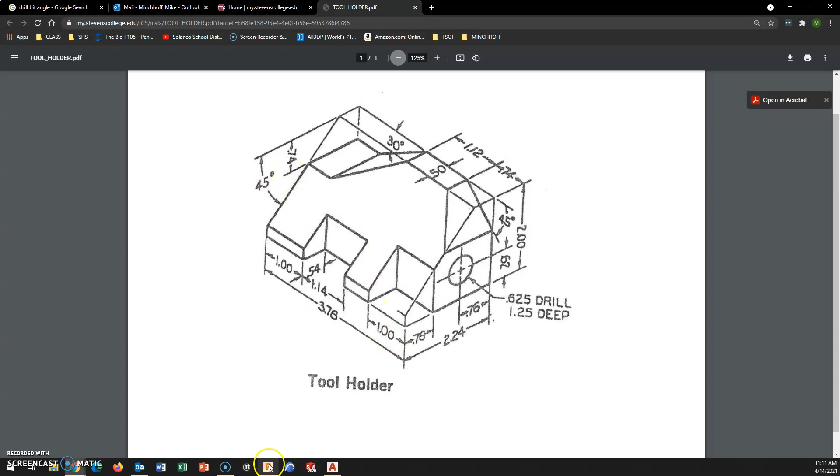Alright, for this tutorial, we'll take a look at creating the tool holder with AutoCAD. The new component here is a drilled hole to depth, and the drill hole to depth has the drill point on the end, which we want to recreate. So I have a 3D model here to demonstrate this.

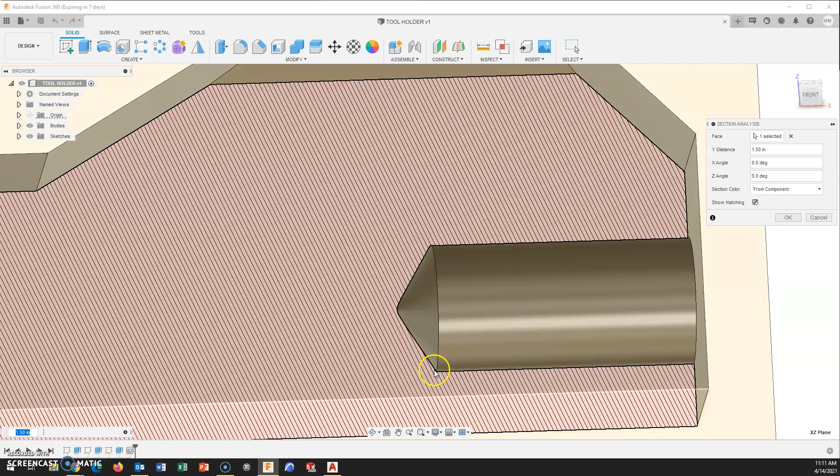We are looking to create the shoulder cut, where it goes from being a cylinder, that is your depth measurement, to creating this conical end. This is that drill point angle. We are going to demonstrate this with a 118-degree drill bit angle, which is one of the two common sizes. Most of your jobber drills are a 118-degree angle. So this is just proof that this 118-degree angle does exist and how common it actually is.

That being said, I did put the inverse angles on the lesson outline for this, and knowing how AutoCAD snaps to angles, this may be relevant information.

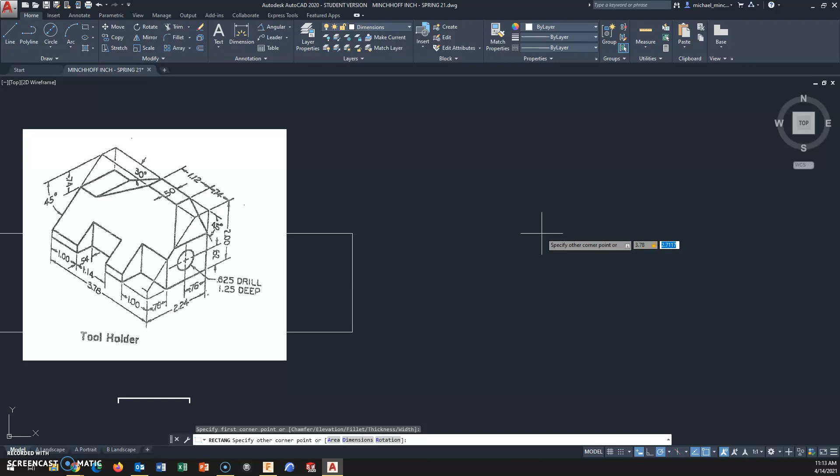First off, let's start with our overall layout. By using the rectangles, I can put in the overall length and width here in the front view. I have an overall length of 3.78 and an overall height of 2, and start building off of this. I'm still recommending a 1.5 inch spacing in between your views.

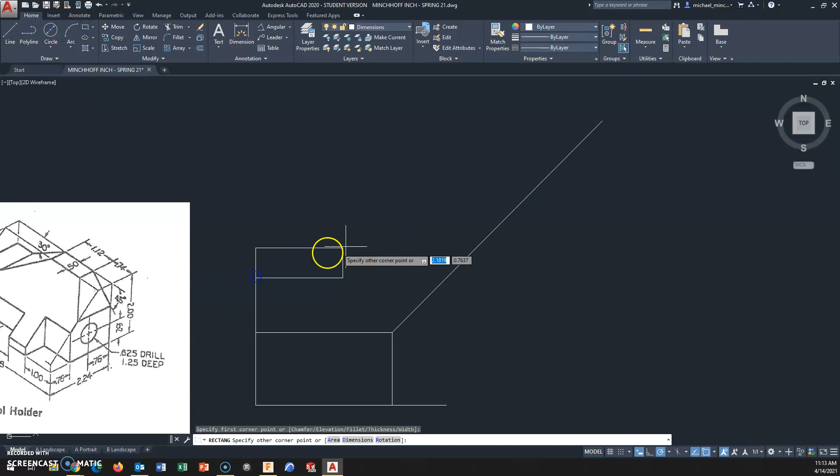And we will create the other boxes and confirm that they project. So the top view, my length is the same, 3.78, by the width is 2.24. I'm just going to confirm that that width is the same.

I could project over, but using the rectangular method, it's probably just quicker to draw it. So, 2.24 left to right, and an overall height of 2. Again, just to ensure that these project.

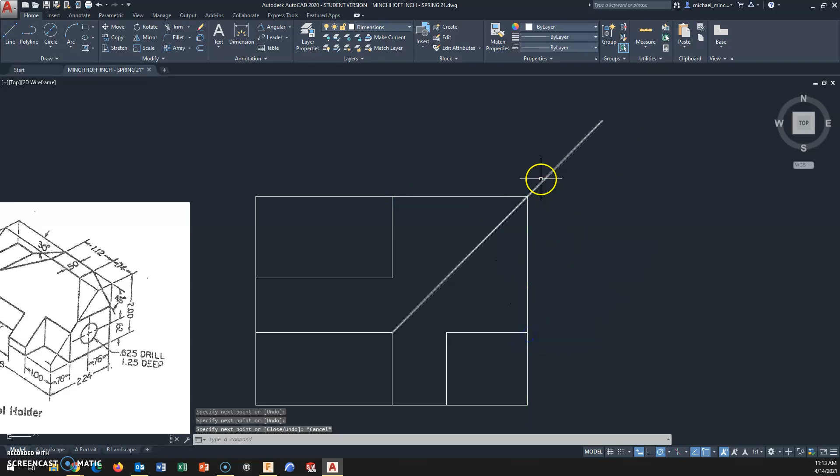Ready to roll. Okay, when using the rectangle, a reminder is that they are grouped together. These are not individual line segments. I would explode all of these at one time. Now I have independent line segments.

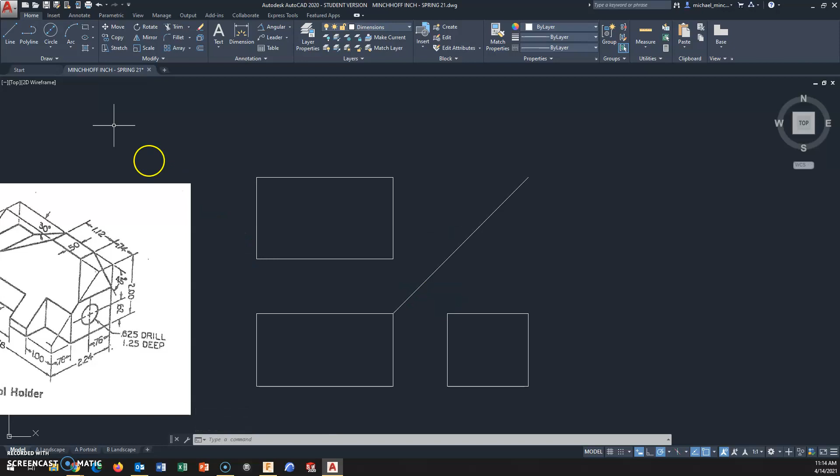Top, front, or right side view wouldn't matter because basic shape, you can really start constructing in any of the views. I'm going to start constructing here in the right side view.

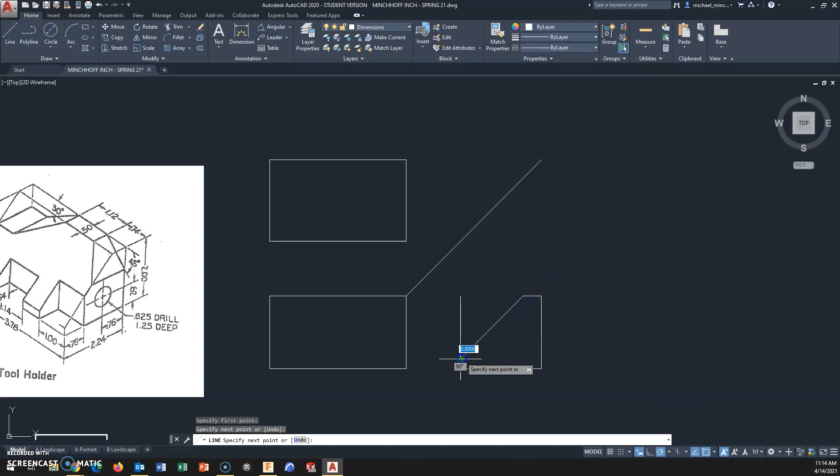Distance across the top is 0.5, and now a 45-degree angle. I do have my angle snaps to 15-degree increments, so a 45-degree angle should snap relatively easy. That will also play in the part with these 30 and 45-degree angles on the top.

So go right here to the right side, come in 0.74, drop a 45, create that 1.12 across the top, and drop a 30-degree angle. And as of right now, I'll extend this.

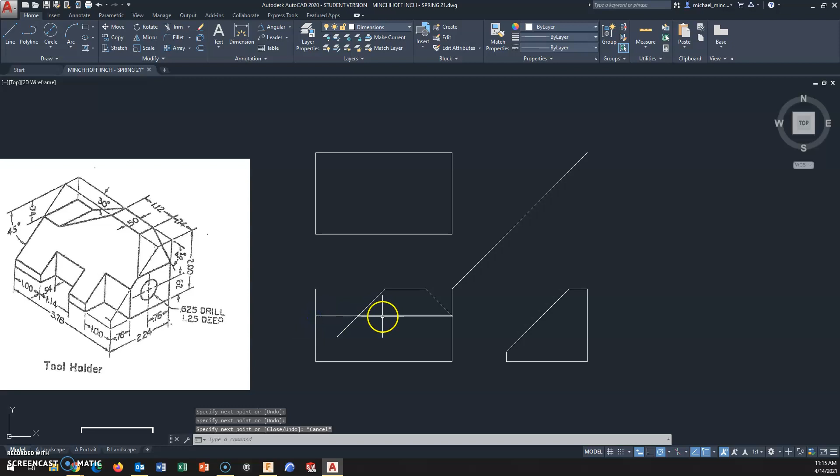Being that this is 0.74 and this is a 45-degree angle, this distance down from the top is 0.74. You can just project this across, and we can project that to the right side as well. I can project straight across for that edge that is created here. I will also have an edge that goes along the bottom from this 45.

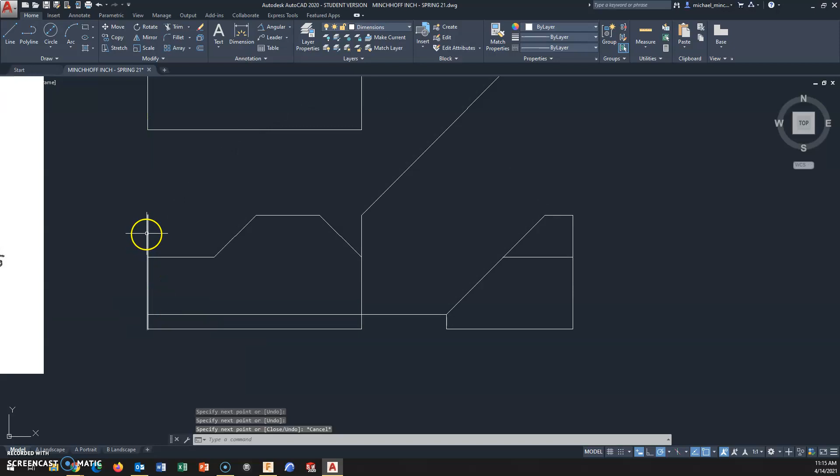So take a second and clean these two up momentarily. All right, so pretty much my rough shape here in the front and right side views. Let's go up here to the top.

So as I measure in 1 inch, I then measure back 0.54. I measure over 1.14, this comes right back out, measure over 1, measure in 0.76. This corner is going to get cut off and connect this corner.

So let's clean this corner up. There's my rough shape in the top. Now it's time for some projection.

I can project over and down for this 0.76 cut. That one's done. I can project down for that 1-inch cut. Now that I have this created, I can project across.

So this edge does not exist because it's cut out of this 45. And I got that through my projection method. So there's this rectangular face cut out to the next rectangular face. I'll just project down first.

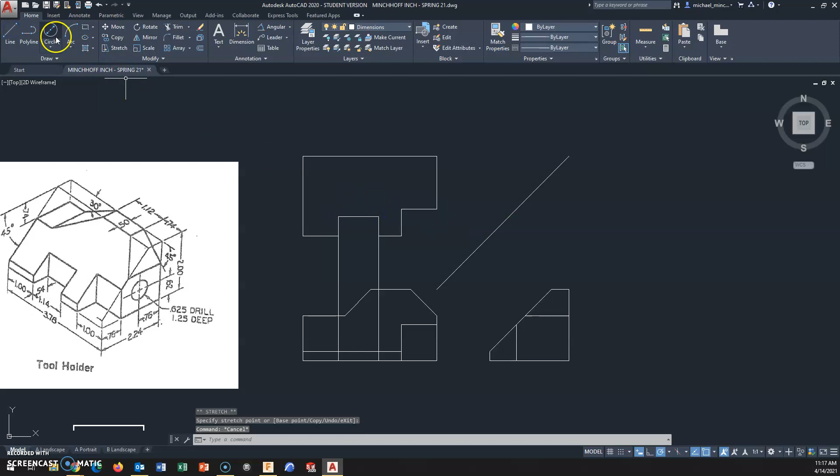Somehow I have the wrong measurement here in the top. This is 0.74, which it is not, it's 0.54. 0.54. I think I caught that before I projected all that information. So this 0.54 will project over and down.

This will be a hidden line, and it will project across to create that rectangular face in the front view. So trim this off. Stretch or trim. That's a projection line. All these lines are projection.

So other than the drill point, the drill hole to depth, the front view is really done. The right side is really done other than the hole. I have all this information to project to the top. So this is that 1/2 inch measurement across the top. And this is going to project up. And then it's going to project out at an angle, which is generated from this corner in the front view.

Alright, so this one cleans up. And this projects across. That's that flat face across the top. The other flat face across the top. And I need an angle projection here, which is going to be projected from the front view. And I need this hidden line. No, they do line up. That's right, because they're the same depth. They're 0.74 down.

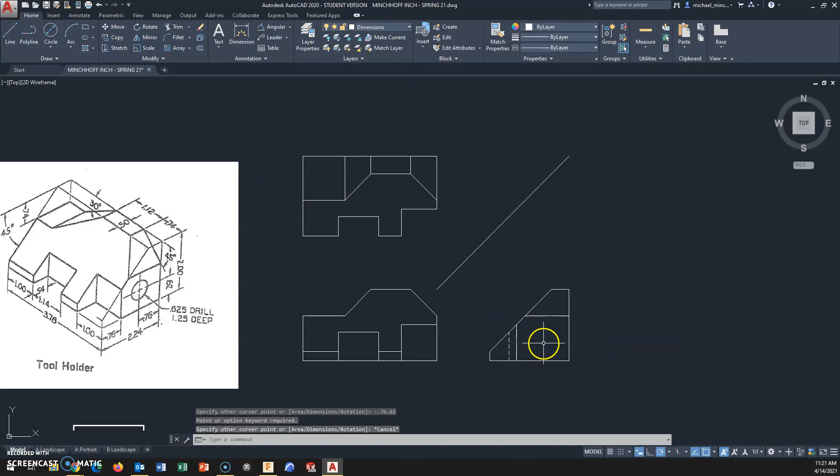Gosh, I want to create a square where I want it. Minus 0.76 tab 0.62. That's the center for my diameter hole of 0.625. All right, so there's the drill hole diameter. I need to create the depth. The depth to the shoulder is 1.25.

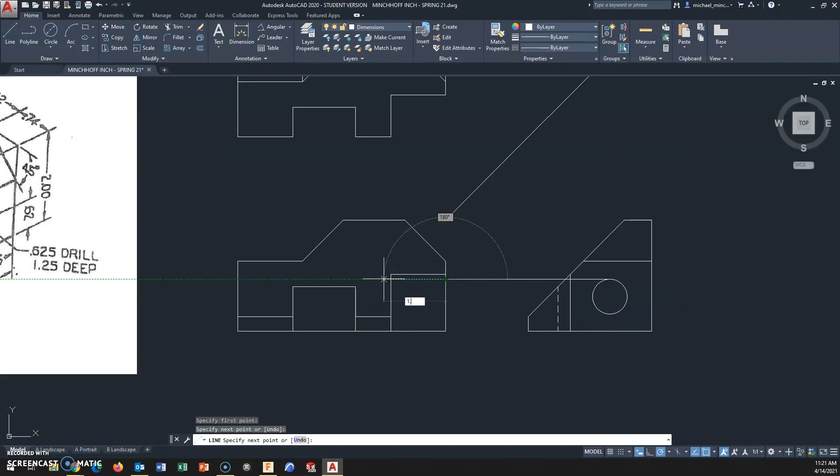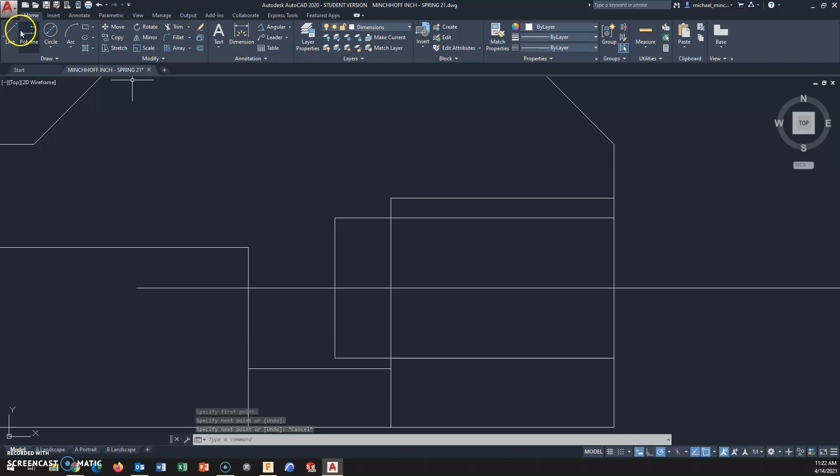And I'm going to project that straight across. So that is the shoulder cut. These will be hidden lines then. And then the center, I'm going to project this across, because making the angle is not the easiest thing to do. Because if my first reference is 90 degrees down, I'm looking to create this angle as being 59. It will snap to 120. The inverse angle is 121.

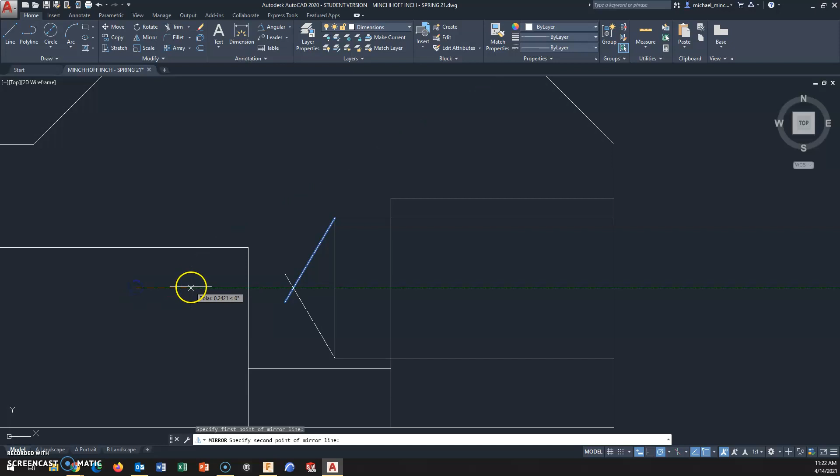Instead of going through that headache of trying to make the angles snap, if I have created an angle that is 59 degrees, which is half of 118, I would minimize your work and frustration and just mirror this and demonstrate that you have an angle that is 118 degrees. So there's my drill point angle. Just clean this up. This will be a center line that does need to extend out past the edge of the object.

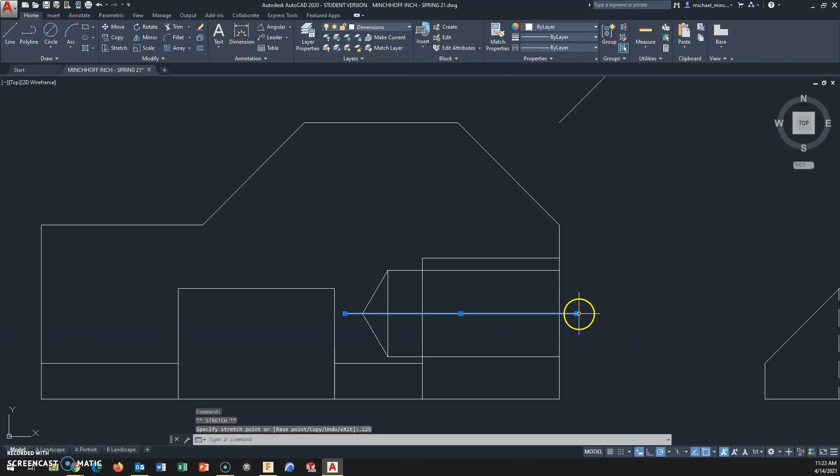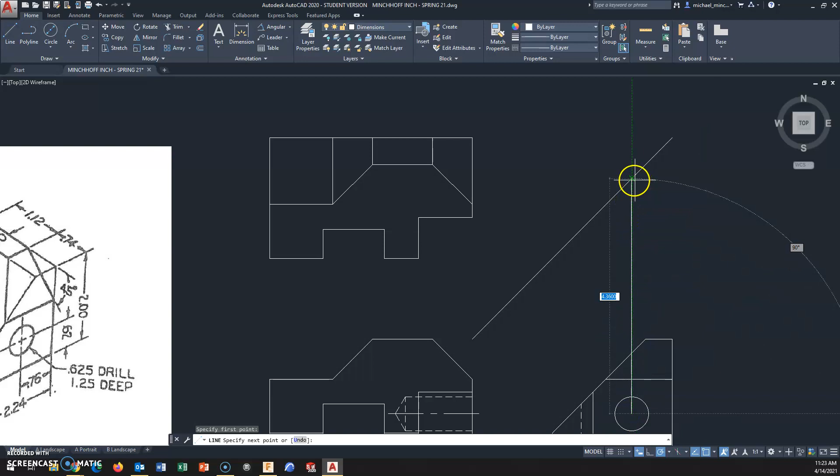And I would copy this to the top view, not try to recreate this, as long as I have a reference point. So hidden, hidden, hidden. And a center line. And we'll project this up to the top. I do need a point of reference, so I'll measure up and over. I will copy this drilled hole to depth. No rotation is needed.

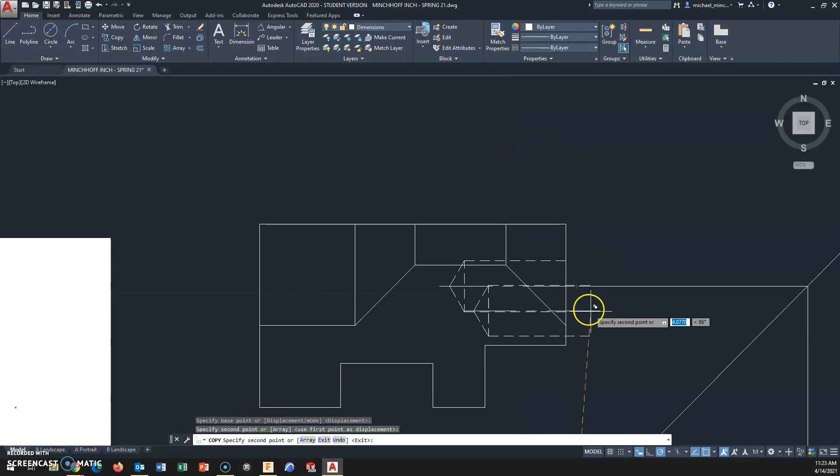Find a reference point and copy it. Okay. Done projecting. No dimensioning note is needed. Center mark. Okay. We'll take a look at dimensioning this.